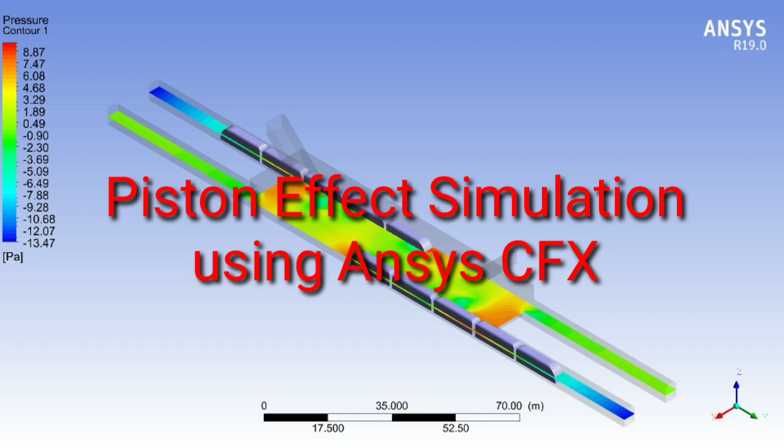In this tutorial we will see how to simulate piston effect in an underground metro tunnel. We will be using ANSYS CFX Immersed Solid method for the simulation.

First, let's get some introduction to the Immersed Solid method. As per ANSYS help, it is the capability of ANSYS CFX that enables us to model steady state or transient simulations involving rigid solid objects that can move through fluid domains.

The Immersed Solid method has some limitations. It doesn't support heat transfer, multi-phase, species, etc. So it cannot model smoke extraction, fire modeling, and environmental control systems to analyze human comfort. Also, it cannot model aerodynamics around the train, as the immersed solid turbulence model cannot accurately predict the pressure field near the immersed boundaries.

So if one needs to perform simulation for any of the above limitations, then we need to create a new simulation and use the data obtained from this simulation as a boundary condition for further analysis.

Now let's begin with the modeling. This is the geometry that we will create.

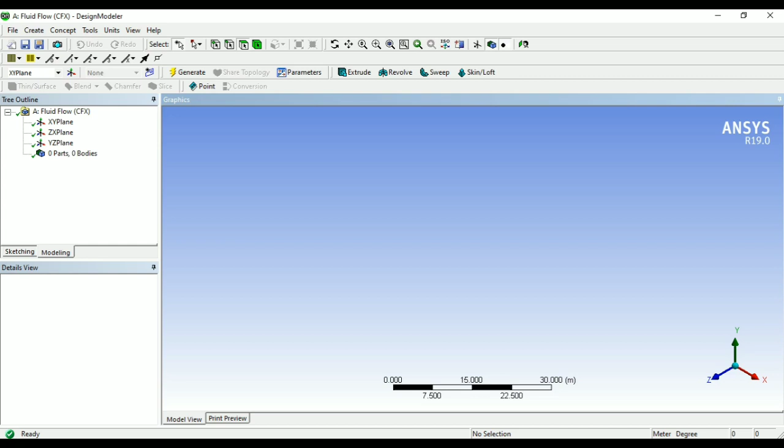Let me rearrange the toolbars to have more graphic space. Make sure units are set to meter, as our dimensions will be in meters.

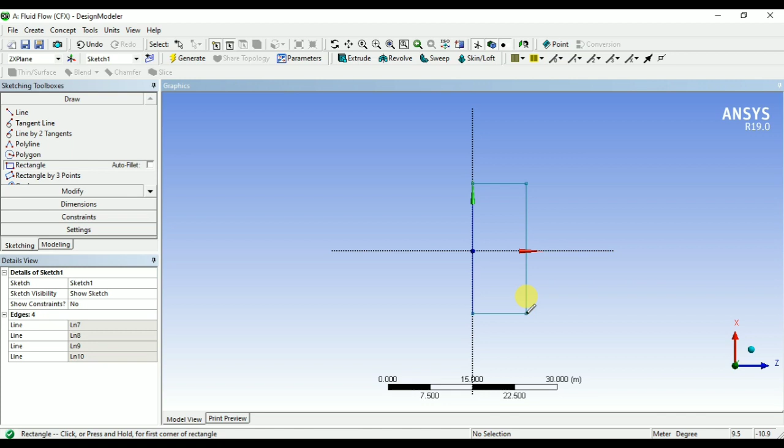Select ZX plane and click sketching. From toolbars, click look at face. Now draw a rectangle. One side of this rectangle is on the x-axis, indicated by C near the mouse cursor.

Now select semi-automatic from dimensions and place the dimensions. L1 is 20 meters, L2 is 8 meters and V3 is 10 meters. 20 is the length and 8 is the width, and this is symmetric to the Z axis. V3 is 10 meters, half of L1.

Switch back to modeling. This sketch will be used for the station, so I am renaming it to station for proper identification. Once again select ZX plane and create two more sketches named tunnel and train.

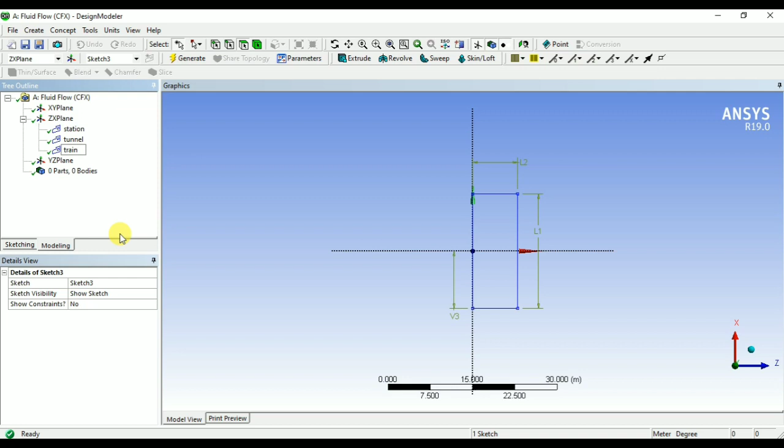Select tunnel and click on sketching, and create a rectangle. Select the first point anywhere on the top edge of the previous rectangle. When the selected point is on the previous rectangle, it will be indicated by letter C near the cursor. Draw rectangle as shown in the video.

Now go to dimensions and select semi-automatic and place dimensions. Provide dimensions as 5.5 meter length, 4 meter width and 4 meters from the side of the previous rectangle.

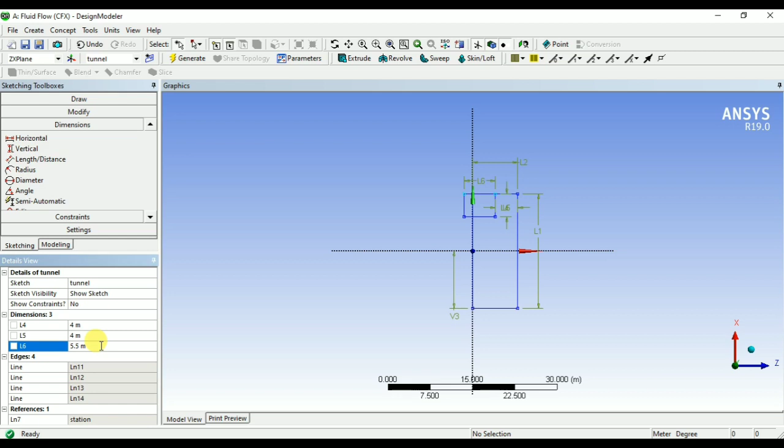Now select modify and fillet two corners as shown. Now switch back to modeling.

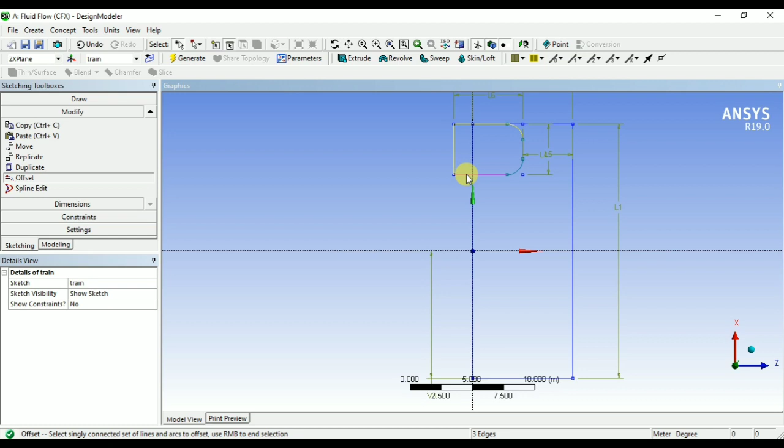Select train and switch to sketching. Click modify and then scroll down to select offset. Select all sides of rectangle from the tunnel sketch, including fillet corners. Once all sides are selected, right click and select End Selection, and place the offset by clicking inside the rectangle.

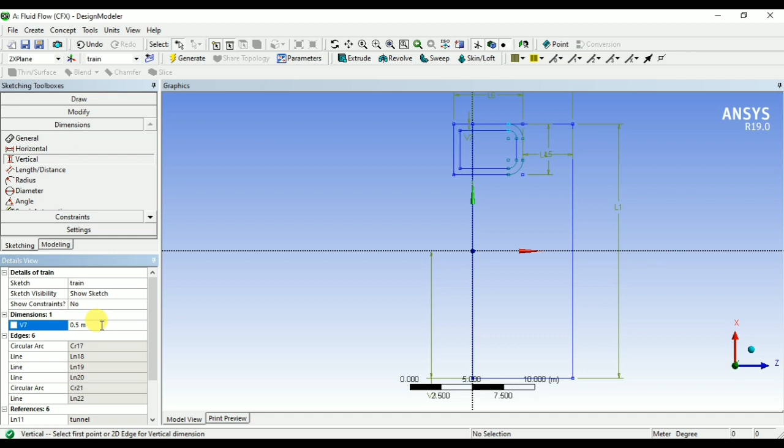Now go to dimension and then vertical. First select the outer rectangle and then the inner rectangle. Place the dimension and provide the dimension as 0.5 meters. Now sketching is complete. Switch back to modeling.

Select train sketch. Click extrude from toolbars. Select operation as add frozen, because we don't want the train to merge with other objects. Depth as 15 meters, its length of compartment, and click generate.

Our train has 5 compartments. We need to create 4 more. We will do this using patterns. Select create from menu, pattern, select compartment and click apply.

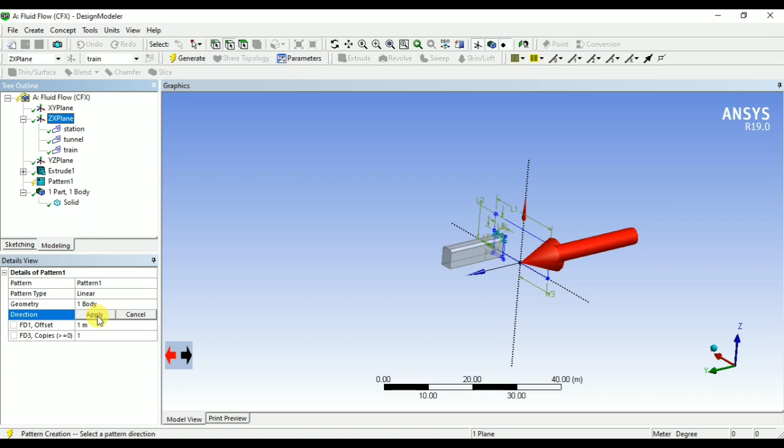Click direction and select ZX plane normal. Click apply. Gap between compartments is 1 meter, so FD1 is 16 meter, 15 compartment plus 1 gap. Click generate.

Select all 5 solid compartments. Right click to form a new part and rename it to train.

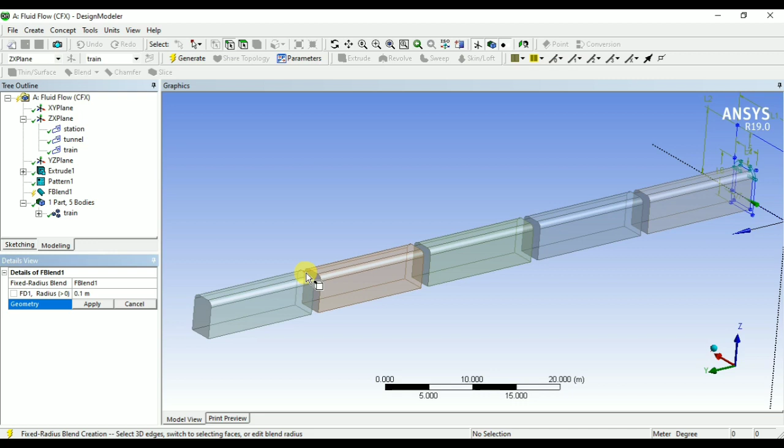Now to provide some aesthetics, blend the edges of the train compartments. All intermediate edges as 0.1 meter fixed blend. Press generate.

Once again, select fixed blend from toolbars and select first and last edge of train. Enter 3 meter as radius and press generate.

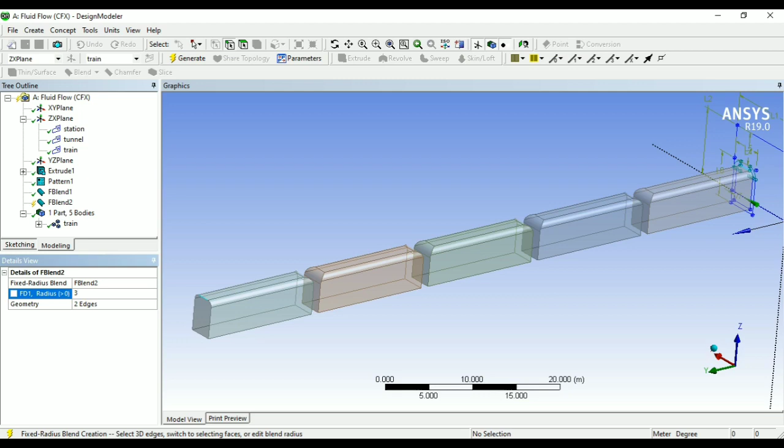Now this train we created, initially it should be outside the tunnel. For this we need to translate the train.

Select part train, click create from menu and select body transformation, translate. In bodies click apply. Click direction selection and select ZX plane. Reverse the direction and enter FD distance as 101 meter. Click generate.

Now we need to create the tunnel. For this, select the tunnel sketch from ZX plane and click extrude from toolbar. Click apply to geometry. Select operation to add frozen and direction to both symmetric. Depth as 100 meter. Press generate to generate the extrusion.

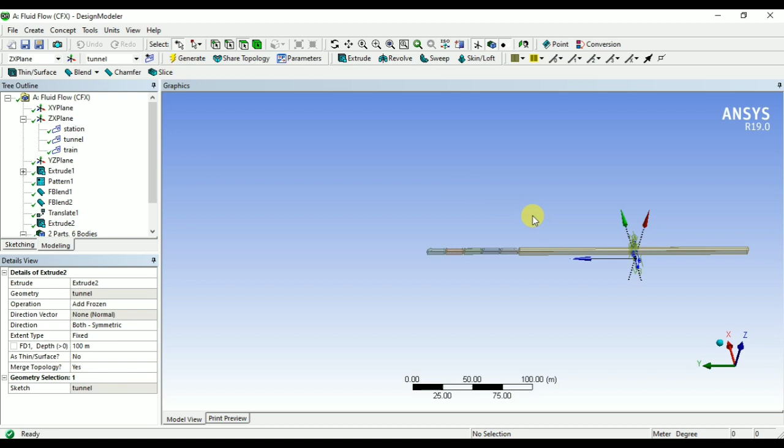Similarly select station and click extrude from toolbar. Operation as add frozen. Direction to both symmetric and depth as 45 meters. Press generate to generate the extrusion.

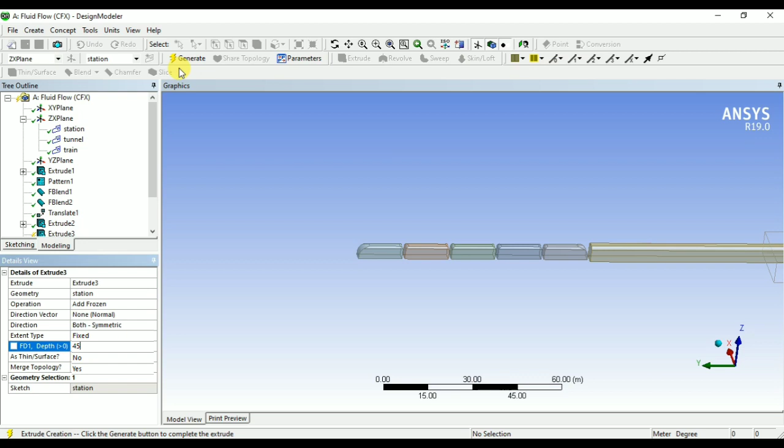Now we need to create station entry, exit, staircase or elevators. For that we will first create a plane. Select XY plane and click new plane from toolbar.

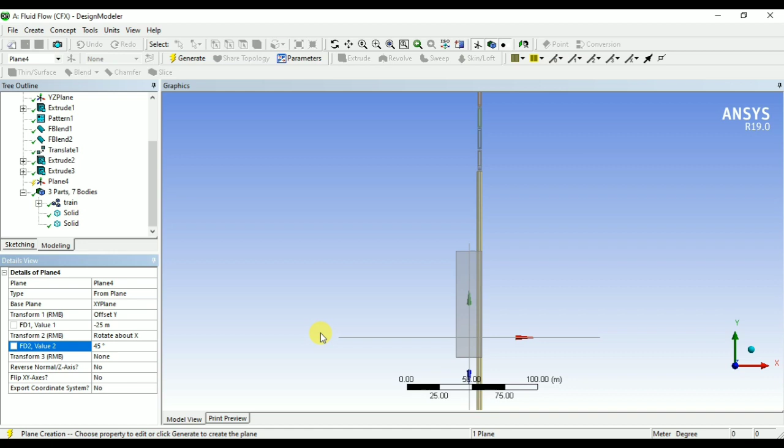Now select transform 1 as offset Y and offset distance as minus 25 meters. After that, select transform 2 as rotate around X and value to 45 degrees. Transform 3 as offset global Z and offset value to 4 meters. Finally, press generate to generate the plane.

Now select newly created plane 4, click look at face from toolbar and click sketching. Create a rectangle with one point on the x-axis, indicated by letter C to display the constraint.

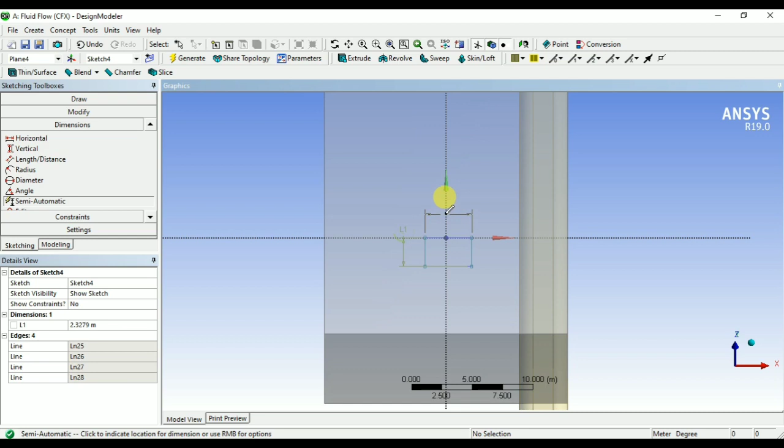Click dimensions and select semi-automatic. Place the dimensions and dimension H3 as 3 meter, L1 as 4 meter and L2 as 6 meters. Extrude sketch 4 by clicking extrude button on toolbar and set depth to 25 meters, and press generate.

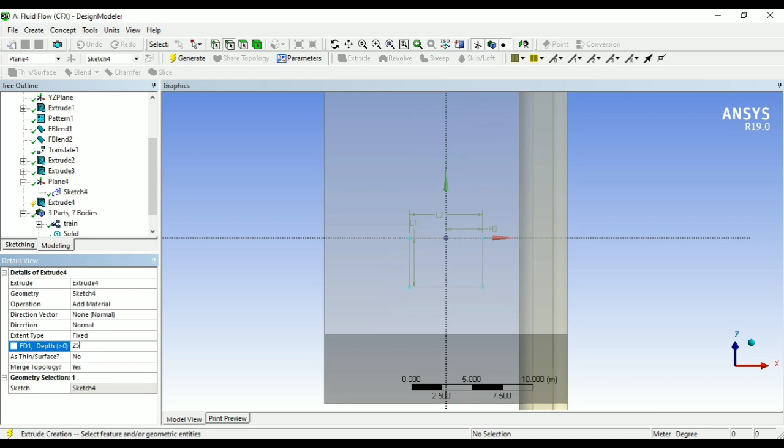Now create a revolve. Select the face and axis as shown. Angle to 45 degrees. Reverse the direction and press generate.

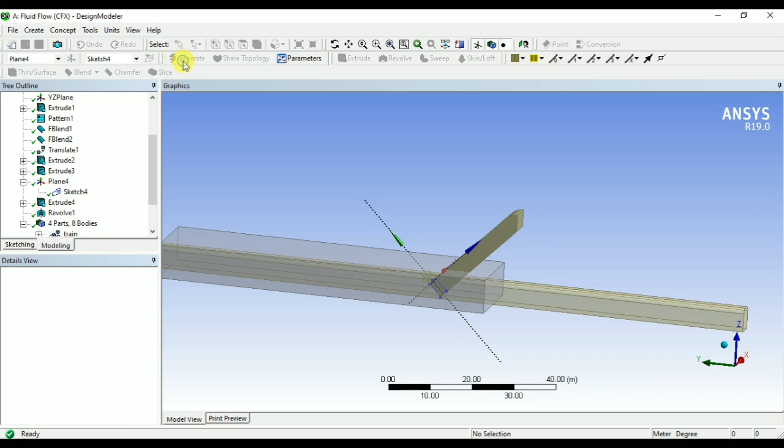Now we need to create one more tunnel, entrance and train on the right side. To do that, we once again use pattern. Select pattern from create menu. Change pattern type to circular.

In geometry, select all bodies except station. Axis selection as XY plane and copies to 1 and press generate to generate the pattern.

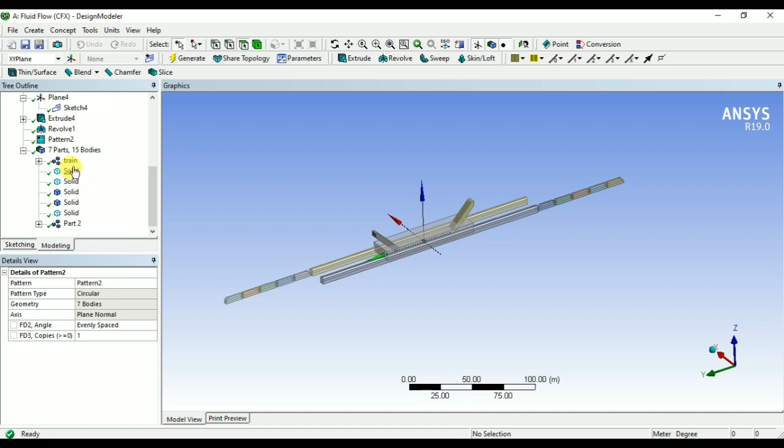Now we need to merge the station, tunnel and station entrance exit created so far. For this, select all solids and select unfreeze from tools menu and press generate. This will merge station, tunnel and entrance exit to a single part.

Now there are only 3 parts named train 1, train 2 and station. I am renaming them so as to have proper identification.

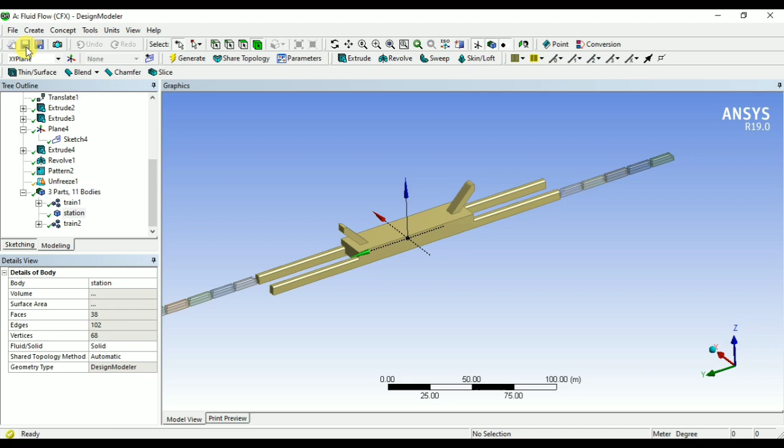Our model creation is complete. Save the project and close the design modeler. In the project schematics, you can see that geometry is complete. Double click on mesh to start meshing.

In project outline, select mesh and in details under sizing, enter max face size as 0.6 meter, max size as 0.8 meter and growth rate as 1.15. Press update to update the mesh.

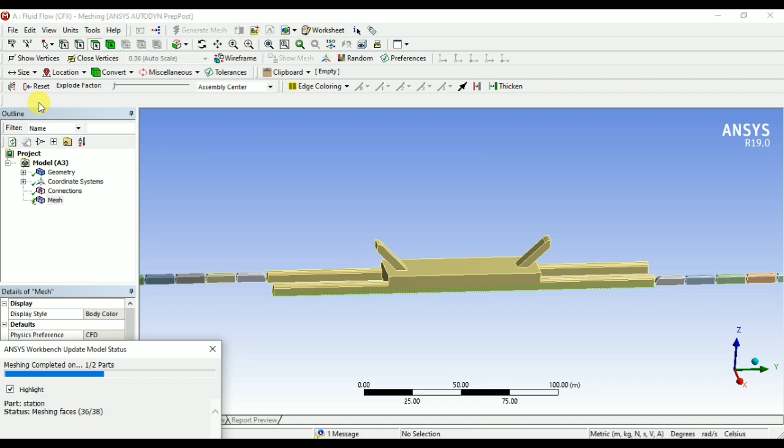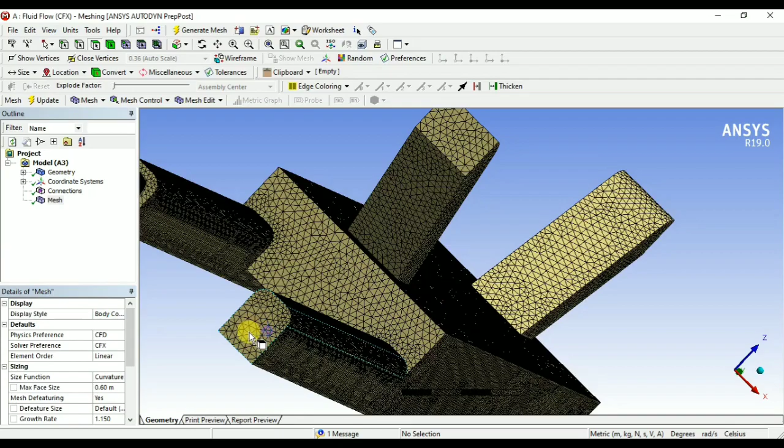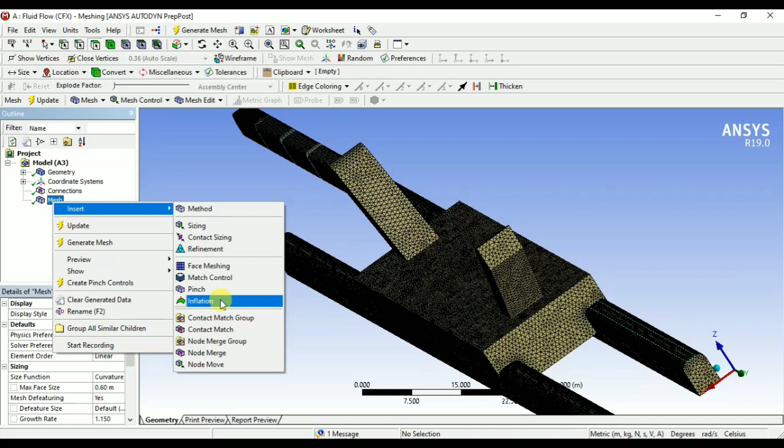Once mesh is generated, zoom to see the mesh. We need to refine the mesh near tunnel walls to have more divisions. For that we will use mesh inflation. In project outline, select mesh and right click, select insert inflation. In geometry, select station body and boundary as tunnel wall except tunnel faces.

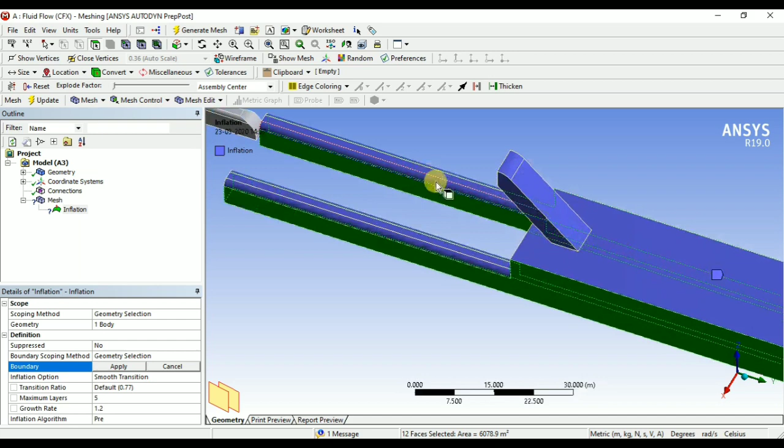Once all faces are selected, press update to update the mesh.

Now on the tunnel faces, we can see that our mesh has inflation layers along the tunnel walls.

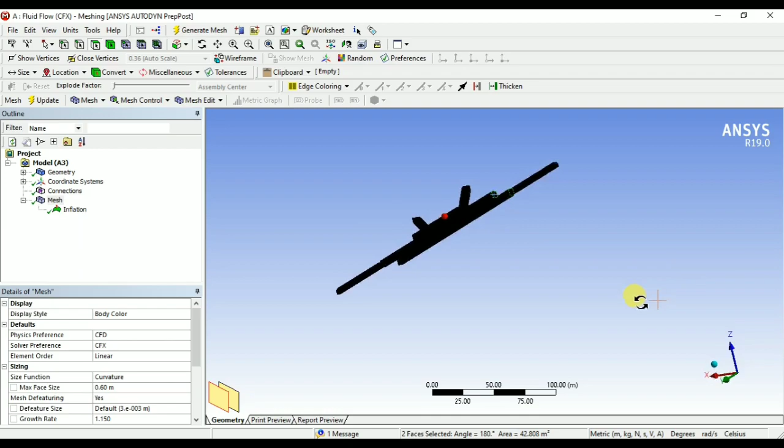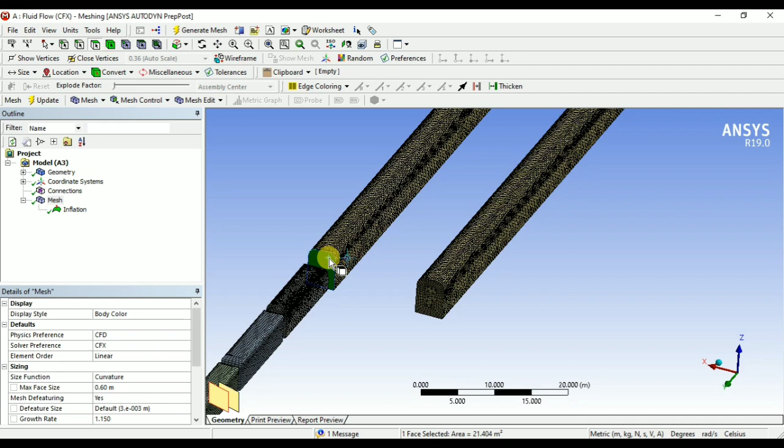Now I will create named selection for tunnel faces and station doors. I am creating all tunnel faces as single named selection, but you can also name the selection individually or as required.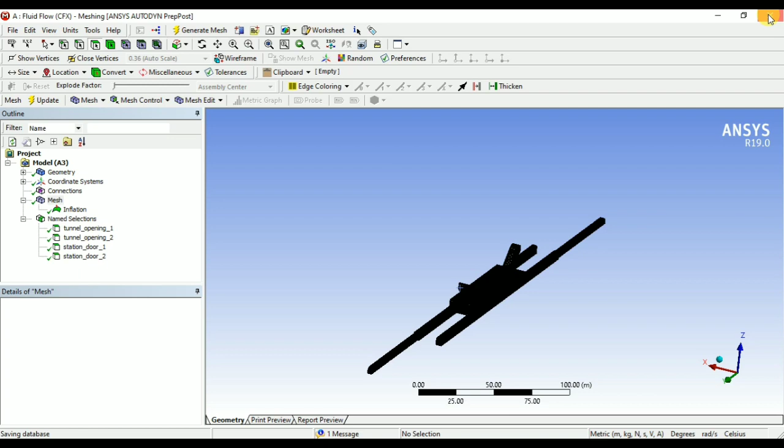Now our mesh is generated. Close the meshing and save the project. In the project schematic, we can see that mesh is complete. Now we proceed to CFX setup. Double click on setup to start CFX Pre.

Delete the default domain as we do not want to use default domain. First of all, we will define the expression for motion of the train. Motion of the train is such that initial velocity is 10 meter per second, start stop acceleration is 120 by 360 meter per second square, train arrives at 22 seconds and train departs at 40 seconds.

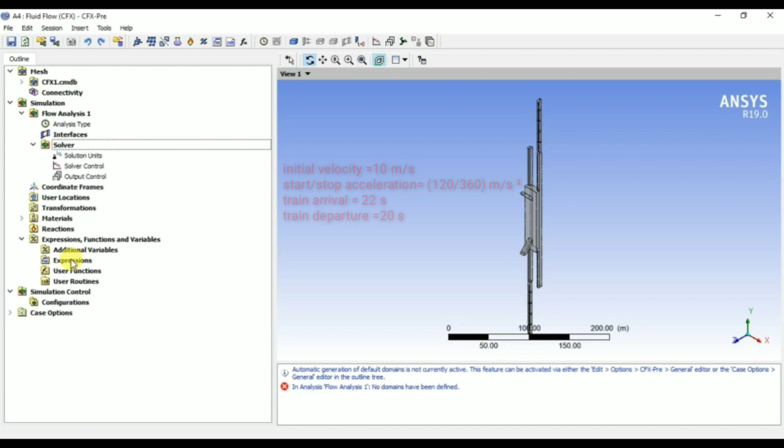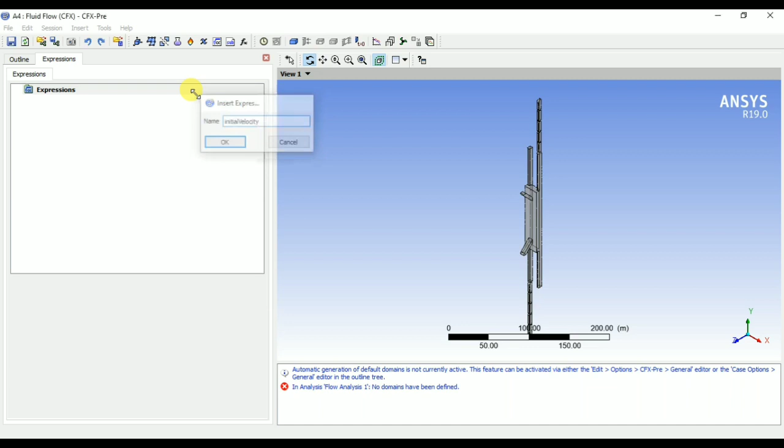To define, double click on expression in the outline window, right click on expression and insert expression. Enter name as initial velocity and in definition enter 10 meter per second. Click apply. Similarly, define expression zero velocity as 0 meters per second.

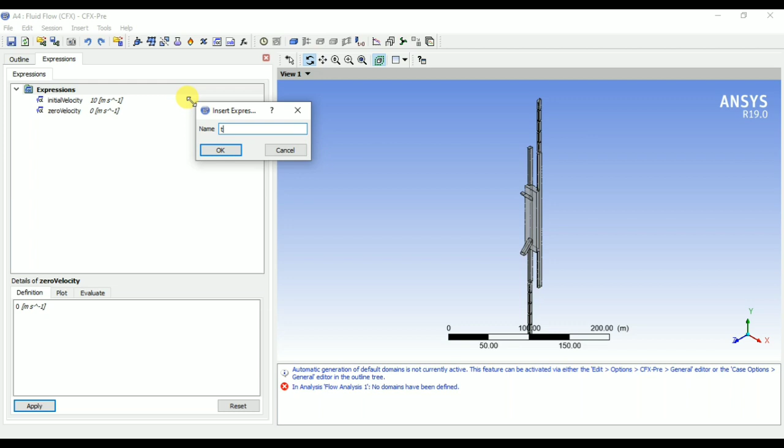T arrive as 22 seconds. T depart as 40 seconds. Peak ACC as 120 by 360 meters per second square.

Zero ACC as 0 meters per second square. Actual train acceleration will be variable. Acceleration will be negative when train is stopping, 0 when train is stopped and positive when train is starting. We define that variable acceleration by expression ACC.

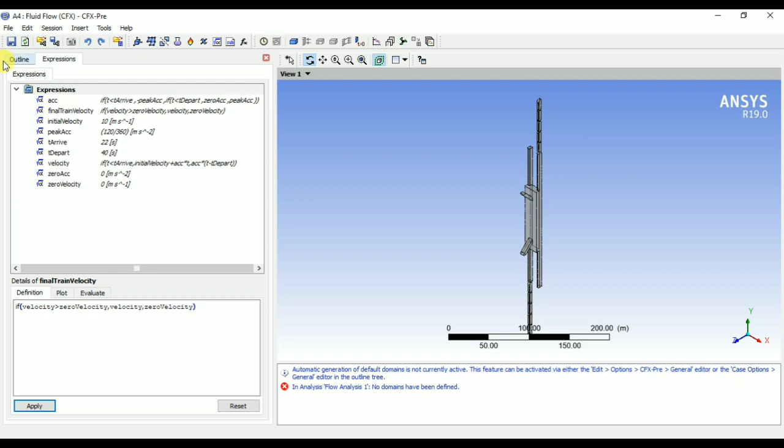Now we have all required expressions. Switch to outline. Double click on analysis type and select analysis type as transient. We will simulate for 80 seconds with 1 second time step. So enter total time as 80 seconds and time step as 1 second. Click OK.

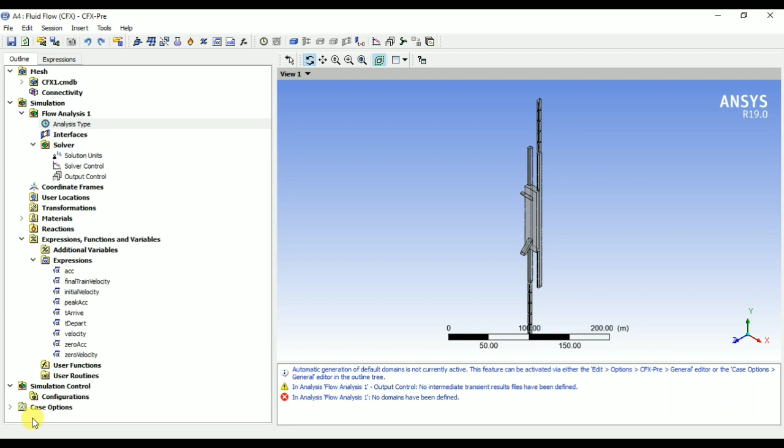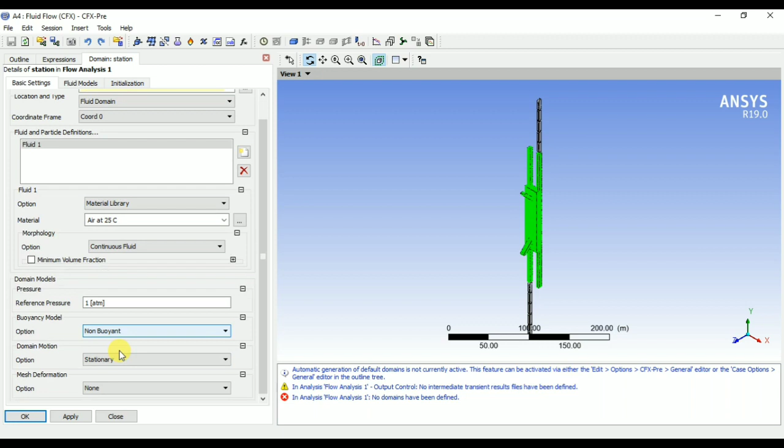Now right click flow analysis 1 and select insert domain. Enter the name as station. Click OK. Click multi-select button next to location and select the station domain by confirming in 3D viewer window. Click OK to complete defining domain.

Right click newly created station domain, insert boundary, enter name as tunnel opening. In boundary type select opening. Click multi-select list next to location and select tunnel opening 1 and tunnel opening 2. Switch to boundary details tab and enter relative pressure as 0 pascals.

Click OK. Similarly, create one more boundary named station door at location station doors with type as opening and relative pressure as 0 pascal.

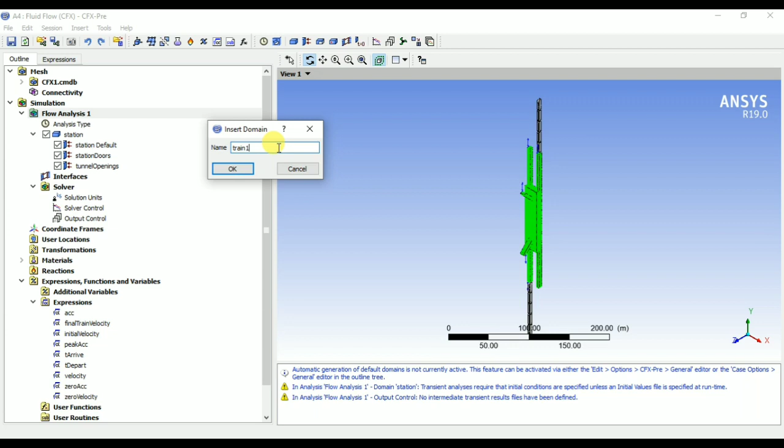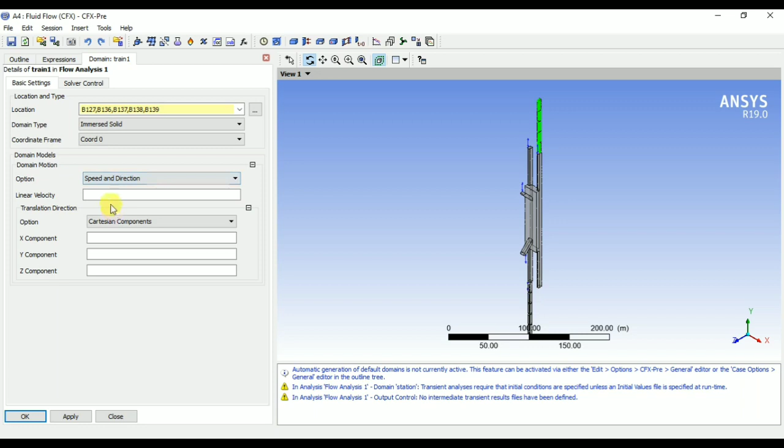Now click on Flow Analysis 1, select Insert Domain, enter name as Train 1, click OK. Click multi-select list next to location, select 5 train compartments by confirming in the graphics window, select domain type as immersed solid. Domain motion option as speed and direction. Click enter formula button next to linear velocity and right click in the text area, select expression, final train velocity. X component as 0, Y component as -1 and Z component as 0. Click OK.

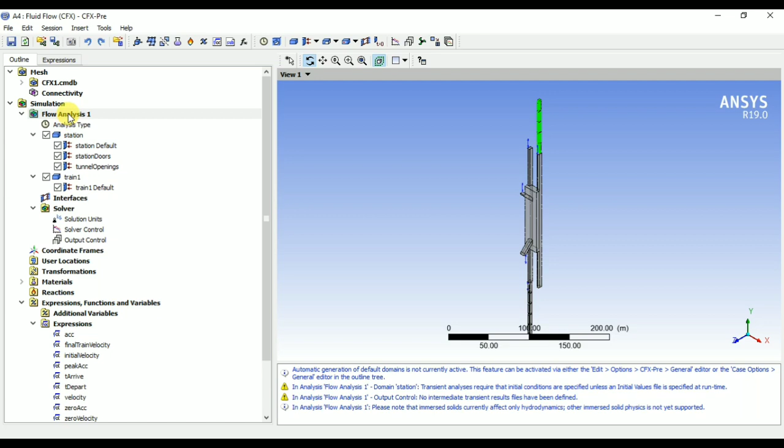Similarly, create second train. Right click on Flow Analysis 1, select Insert Domain, enter name as Train 2, click OK. Click multi-select list next to location. Select 5 train compartments by confirming in graphics window. Domain type as immersed solid, domain motion as speed and direction, linear velocity as final train velocity, X component as 0, Y as 1 and Z as 0. Click OK. Now our domain definition is complete.

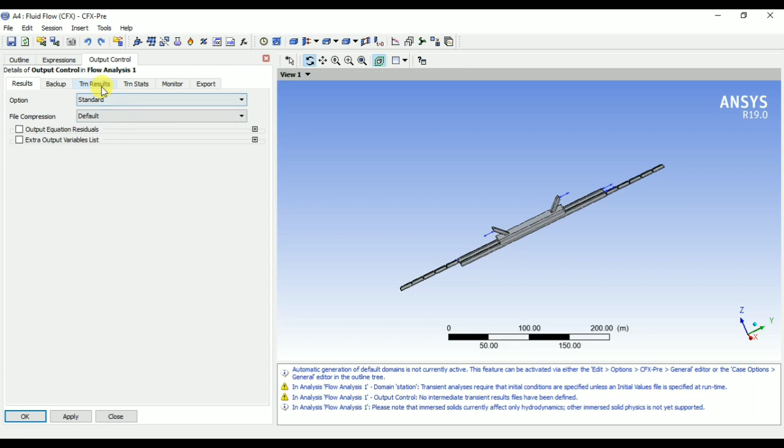Click on Solver Control in outline. We need not change anything. Click OK. Now we need to tell CFX to save intermediate time steps. To do that, double click to open output controls. Switch to transient result. Click new button. OK with default name. In output frequency option, select every time step. OK. Now transient result will be saved at every time step.

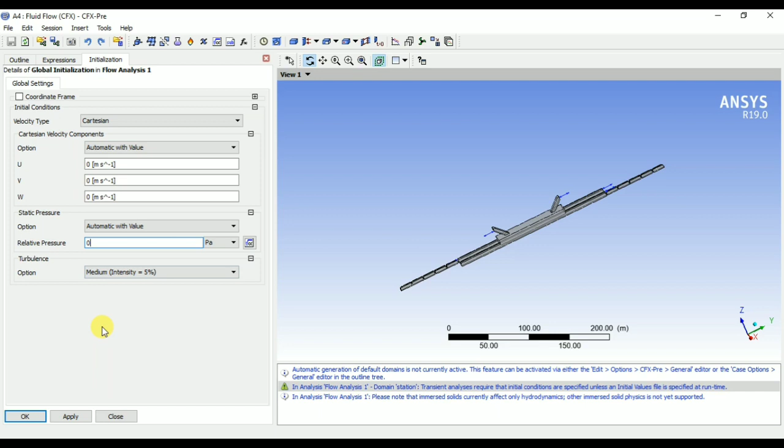Now this is a transient simulation. We also need to define initial conditions. For that, click initial conditions on toolbar. Enter velocity components and relative pressure as 0. Click OK. Click Save button and close CFX-Pre. Now to start solving, double click on solution in project schematic to open CFX Solver Manager.

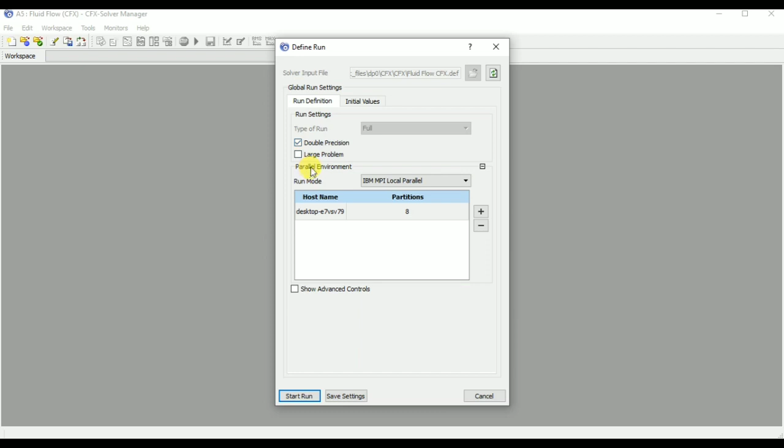I am selecting IBM MPI local parallel and number of partitions as 8. You should select partitions as per processors you have in your workstation. Click Start Run to start solving. It will take a few hours to solve depending on configuration of your workstation. When solution is complete, close the CFX Solver Manager and save the project.

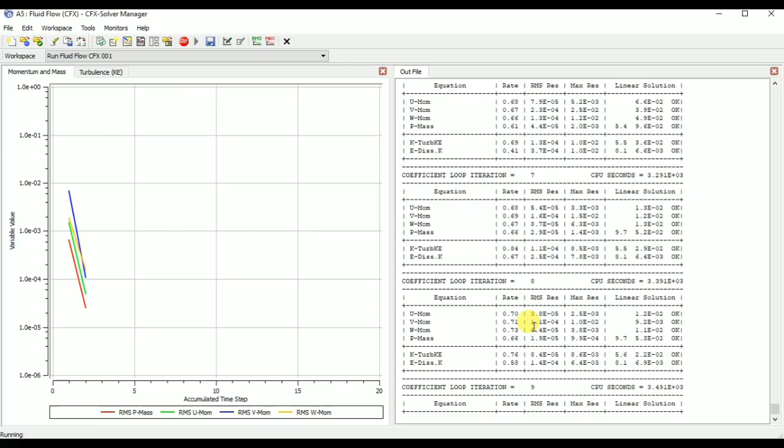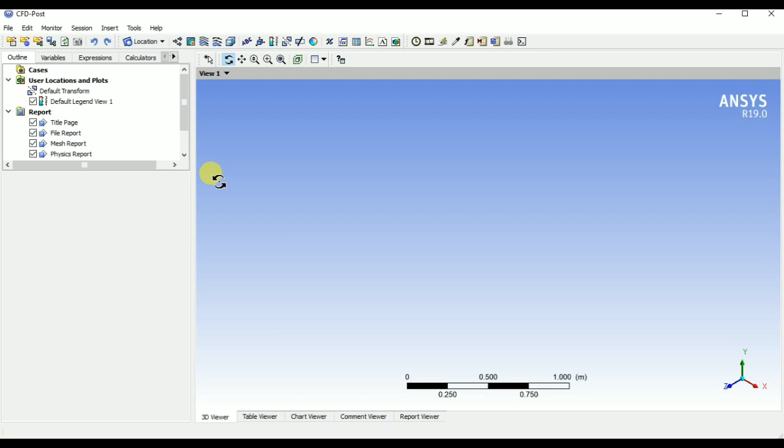Now the last step is to post-process the simulation results. Now after the solution completes, double click on results in project schematic to open CFD-Post. Right click in 3D viewer and select predefined camera, isometric view Z up. Click time step selector from toolbar, double click to select step 0 and click close. This will bring the solution to initial conditions. Now click fit view from toolbar.

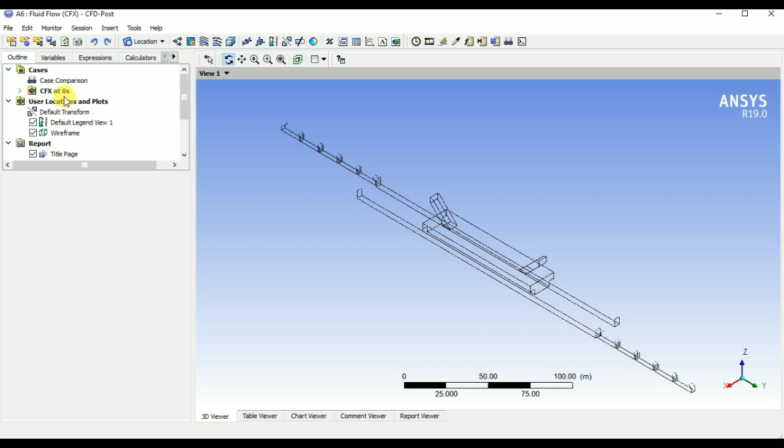Now click location from toolbar and select surface group. Enter name as trains and click OK. In the domain, select all immersed solid. In location, select train 1 default and train 2 default using multi-select and click apply. Create one more surface group using locations from toolbar. Enter name as station and select station default in location. Switch to render and enter 0.8 transparency and press apply. I am turning off wireframe, you may keep it on.

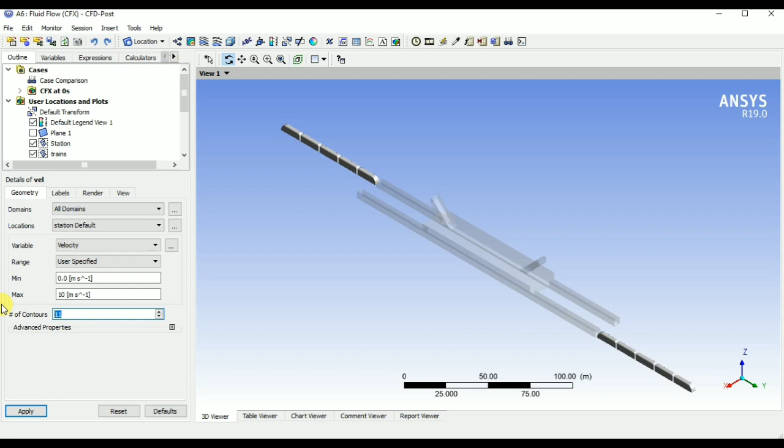Now from locations on toolbar, create a plane, accept the default name, enter Z location as 1.5 meter and press apply. Turn off the plane we created and create a contour from toolbar. Enter vel in name, press OK. Select location as plane 1, variable as velocity, and range as user specified from 0 meter per second to 10 meter per second, and number of contours as 21. Press apply. Edit default legend from outline, switch to appearance and set precision to 2, fixed, click apply.

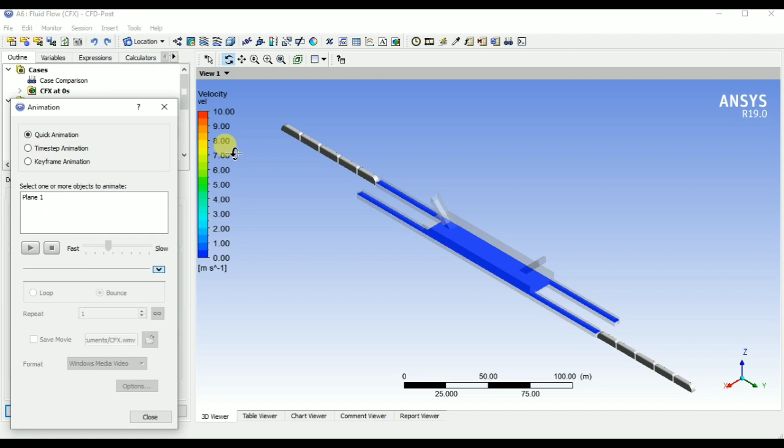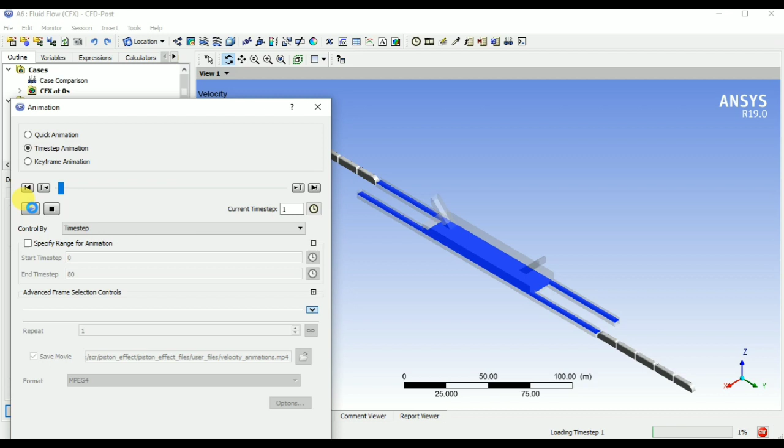Now to create animation of velocity, click animations from toolbar, select timestep animation checkbox, check save movie and select desired location. I am changing video format to MP4. After that, click on play button to start saving animations. It will take a few minutes to save the movie. While this animation is being saved, you can see the contours and moving trains in the 3D viewer window, and piston effect is clearly visible.

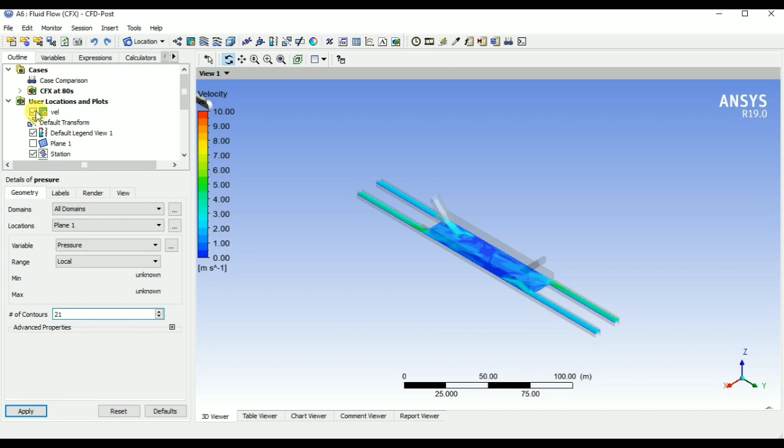Close animations toolbox and similarly create one more contour of pressure on plane 1. Create the movie using animations. Make sure to change the file name to avoid overwriting the previous one.

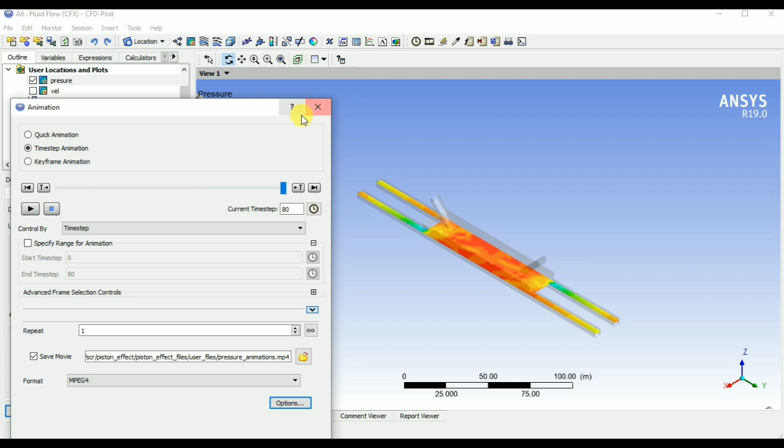Now when movie saving is complete, close the animations toolbox and turn off the contour. Now we will create a chart for velocity in tunnel and station entrance throughout the simulation duration at each time step. Insert a point using locations on toolbar. Enter name as tunnel 1. Enter the point as 8, 50 and 1.5 respectively and press apply. Duplicate this point 3 times to create a point in each tunnel and enter the point as shown.

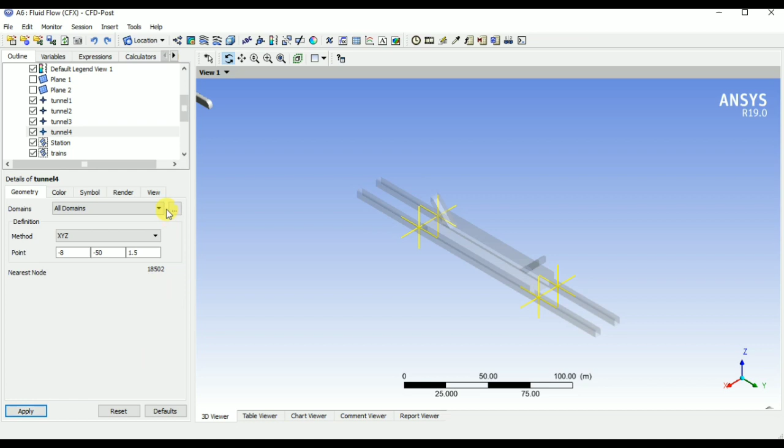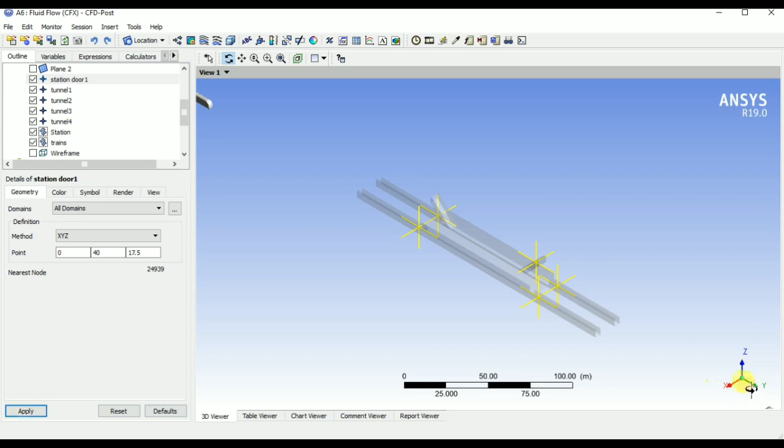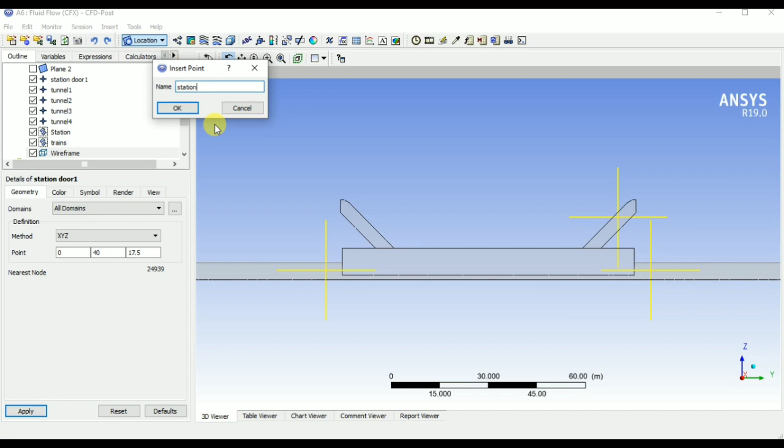Also create 2 points for each station door and point location as shown. Confirm the location of all 6 points we created so far from 3D viewer.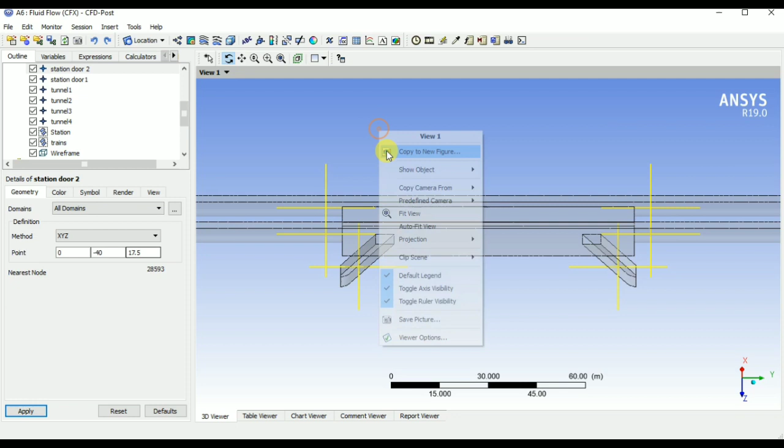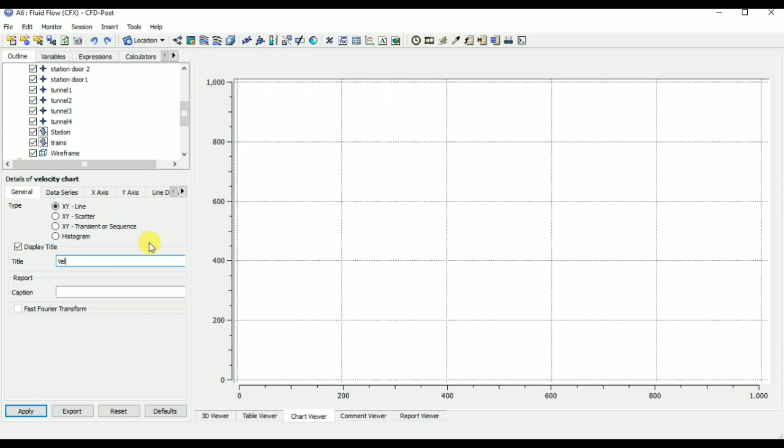Click Insert Chart from toolbar. Enter name as velocity chart. Select type as XY transient or sequence. Enter title as velocity. Switch to data series and select series 1. Enter name as tunnel 1. Select tunnel 1 from location. Create new series and name as tunnel 2. Select location as tunnel 2. Similarly, create the series for tunnel 3, tunnel 4, station door 1 and station door 2 with location as respective points.

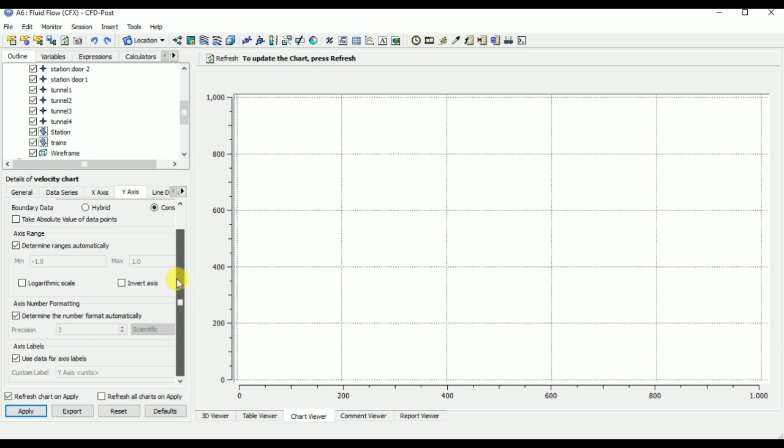Switch to Y-axis tab and select variable as velocity. Click apply. This will take a few minutes to create the chart.

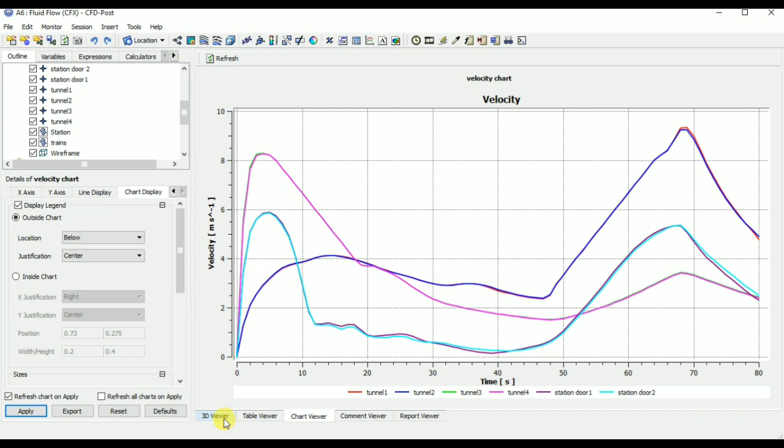Once the calculation is complete, you can see the velocity profiles at different time steps. Velocity data obtained from this chart can be used to design other services such as tunnel ventilation system and HVAC services for environmental control system. Try experimenting with the results.